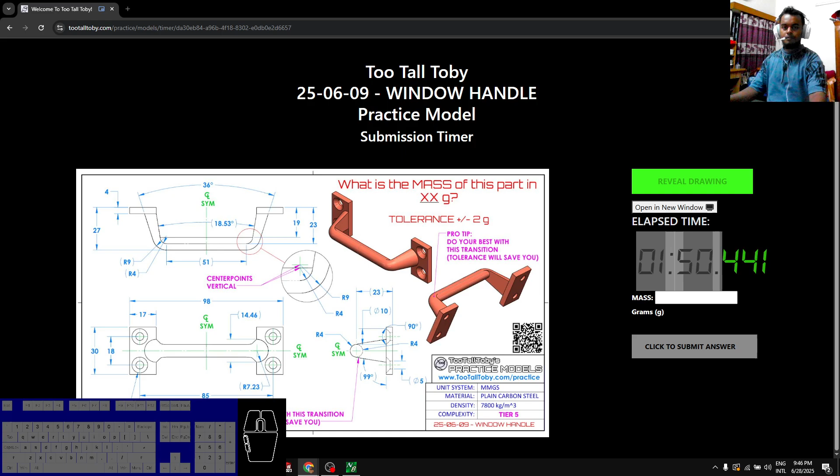Wait, let me just open this in a new window. There we go. Alright, let's begin.

Select the front plane, sketch. Throughout this video I'll be using shortcuts which you can see in the overlay.

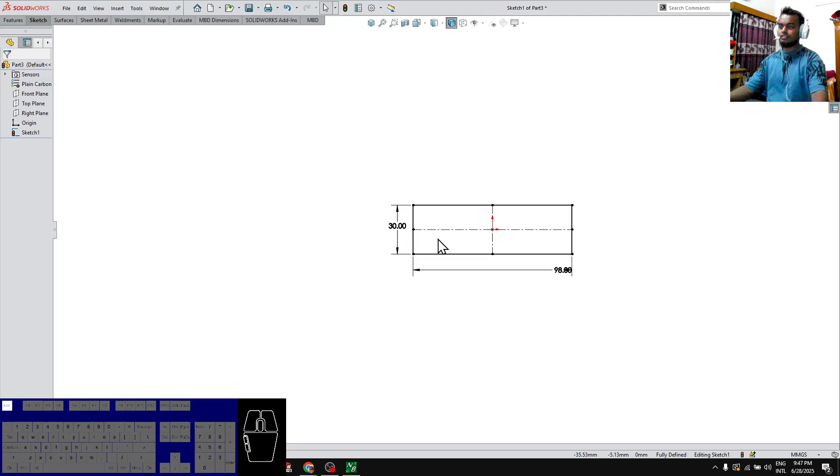Sorry, this one should be 98. This one should be 30. And another rectangle, which is 17 millimeters. Shift Alt, hold it and select these two regions, and a context menu pulls up the extruded boss base.

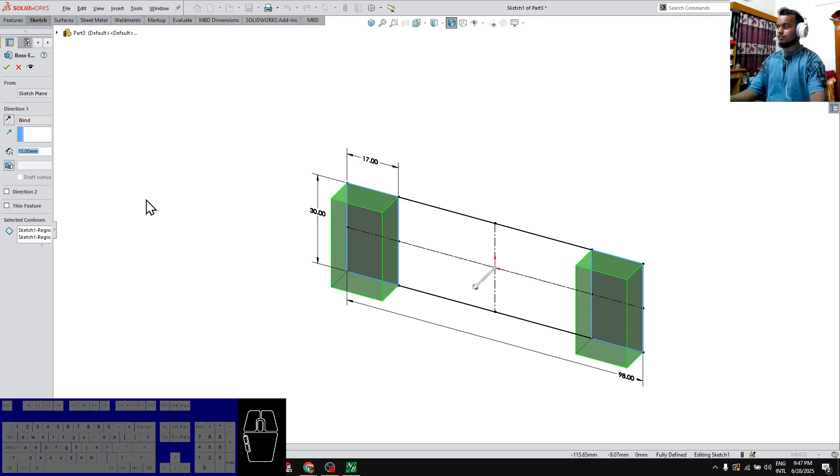We can extrude it 4 millimeters. Then we can sketch that circle in the right plane. It goes up to 23.

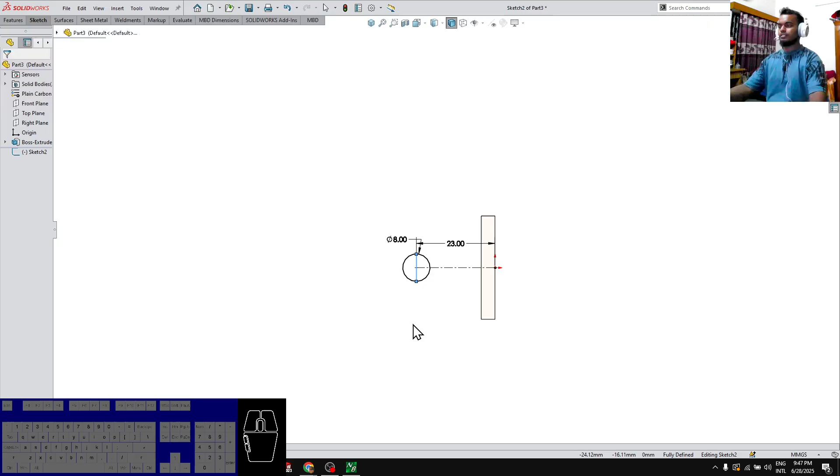Then draw that circle of radius 4, which means the diameter should be 8. We'll only extrude half of it just so we have a nice path, a nice profile for the loft. Right click mid plane and type in 51.

Now we have this profile. Now we need one half circle right here, and then we need the path for the guide curve. Let's create the half circle in this face.

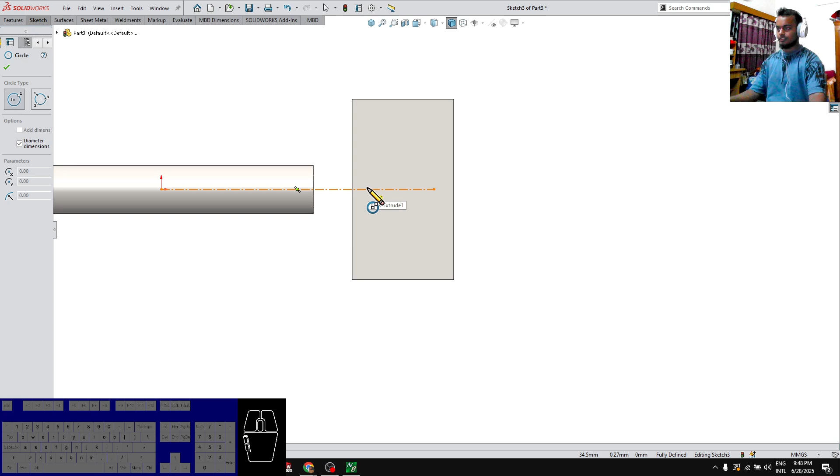Okay, let's create a centerline for maintaining symmetry in the circle. The circle has a diameter given as 7.23 times 2. And let's just convert this entity, delete this thing.

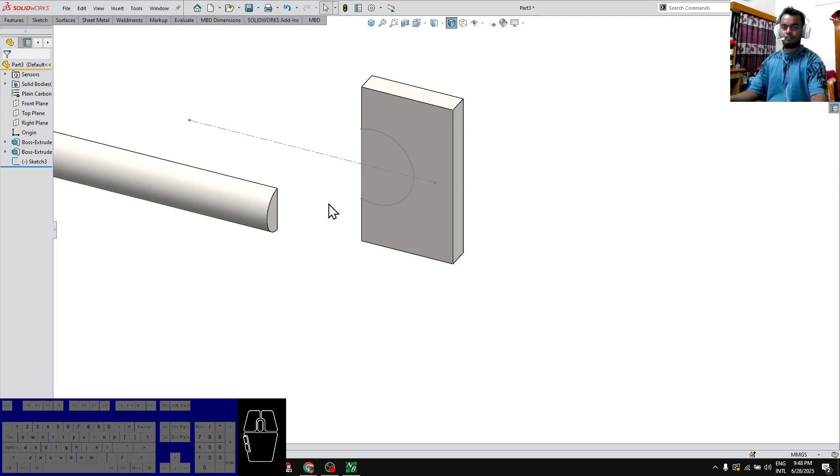Okay, we have a basic path. We don't need to fully define it, we will fully define it later. Now we will create that path.

Let's select this face and go to sketch, convert entities. Let's drop it down and select intersection of curve. What this does is create a nice line which intersects that curve in our plane.

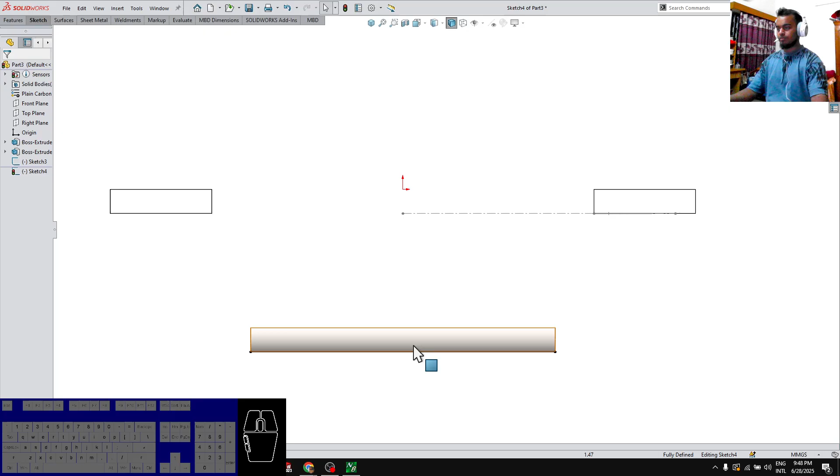Now we can draw a tangent arc, and then connect it right here. Make this tangent as well.

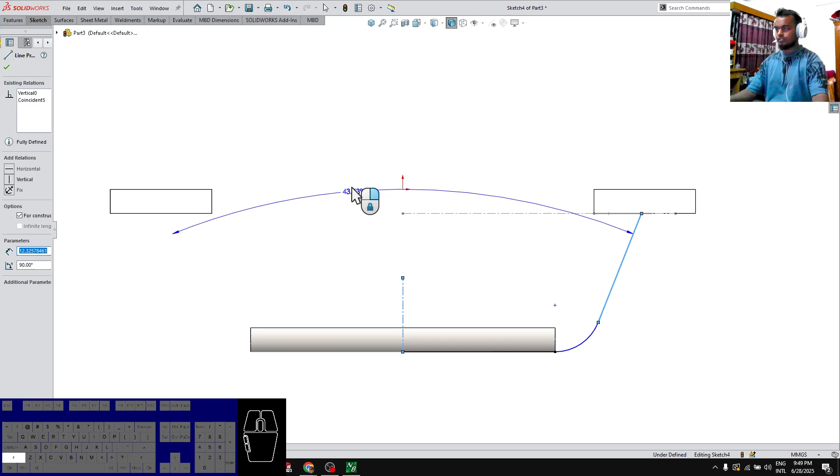The angle with the central axis is 36 degrees. The radius of this fillet is 9. Okay, now it's fully defined, and this is the point where this circle should terminate.

Let's hold the sketch and drop it above the sketch. Otherwise, we cannot create a relation between these two.

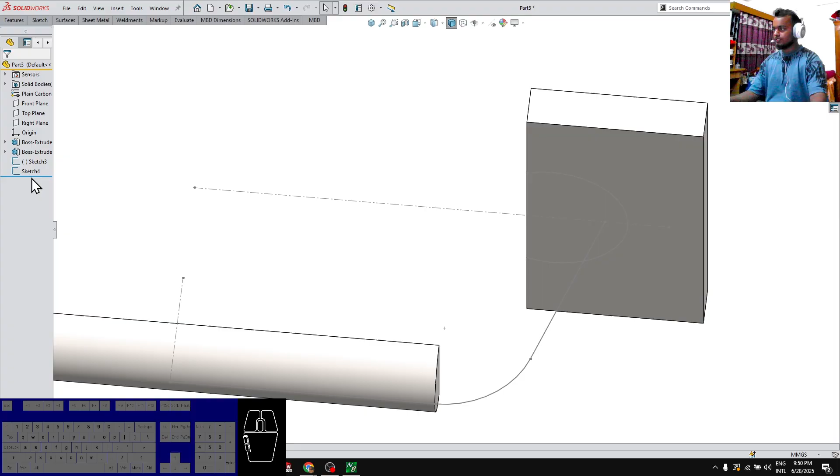Okay, this is not doable because we have used a line from that sketch. Now we will just delete this sketch. No, we can just delete this sketch and draw it once again. Yeah, no, I think we can just draw another sketch. Let's just draw another sketch.

Because it has been derived and it is now a parent of the sketch, make this point and this circle coincident. The diameter should be 7.23 times 2.

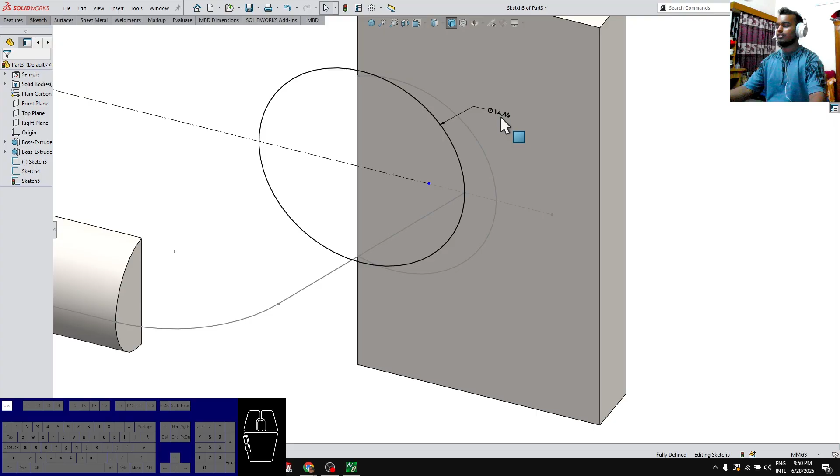Now it's fully defined. Let's convert this entity and delete everything that's not necessary for us. Now we have a closed contour. We don't need to see this sketch, but we can't delete it either because it's a parent.

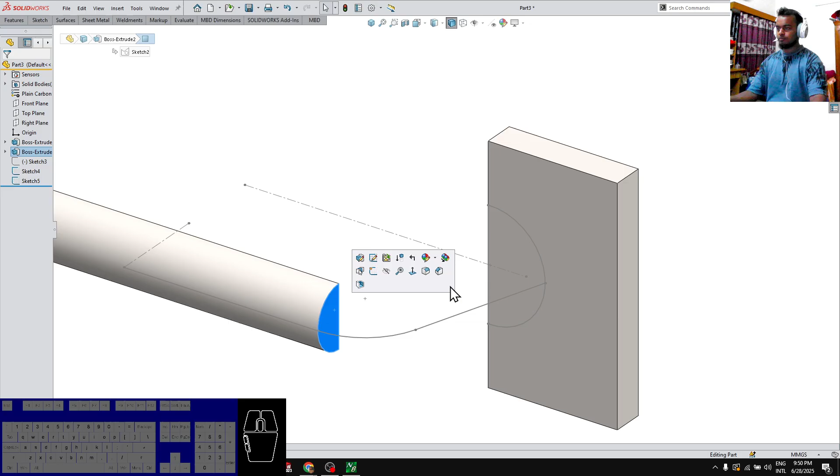Now we have two profiles for the loft and a guide curve. One guide curve is not enough, so let's get another guide curve real quick.

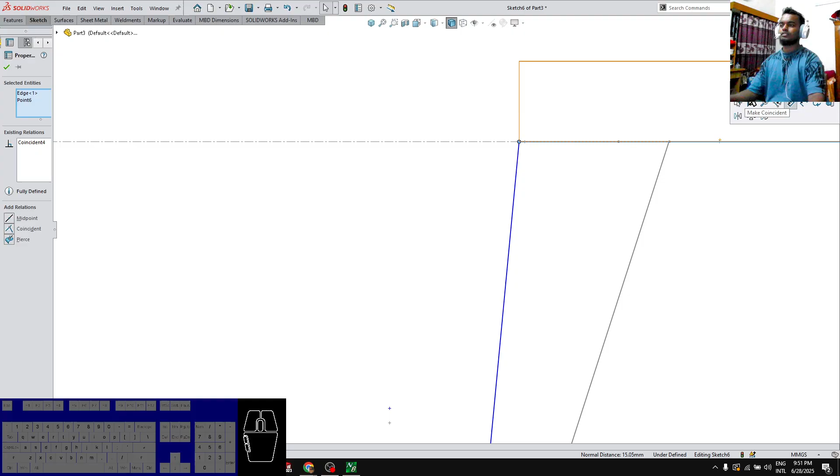Okay, it touches here and also coincides with this tangent. Radius is 4 millimeters and that's fully defined. Now we have two paths that we can use as a guide curve.

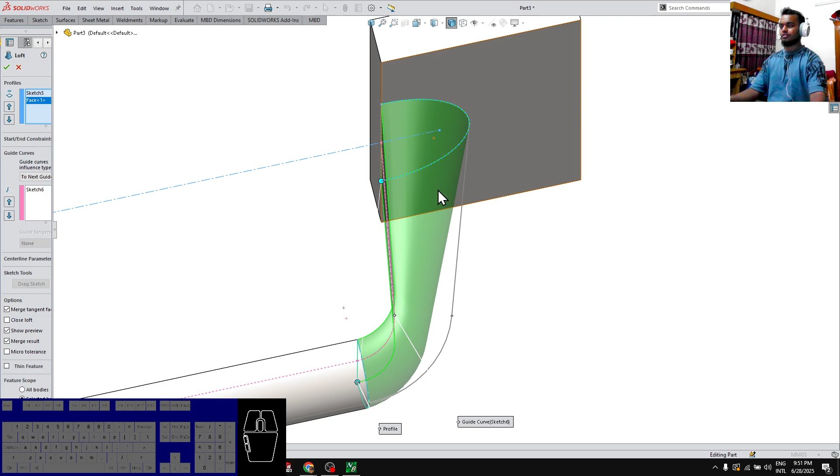Let's go features, lofted boss base, select the profiles, this one and this face right here. See, it is not going as we want it to go. So we will right click selection manager in the guide curve and select group, this one and this one, right click. See, it's a nice transition.

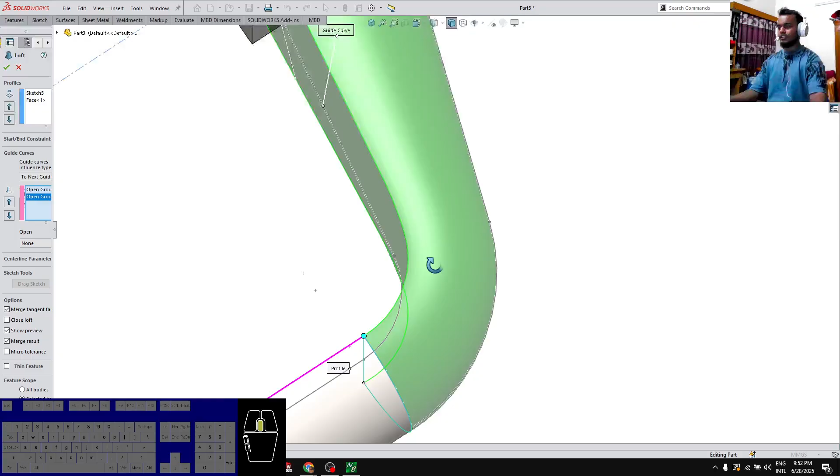We don't have the correct transition for this portion, so we will go again to selection manager and select these two groups again, and now this is perfectly just as we wanted. Hit OK.

There we go. Now we just need to mirror it. Okay, we don't need this body anymore. We will delete this body and also use the right plane to cut with surface for this body, then mirror this across.

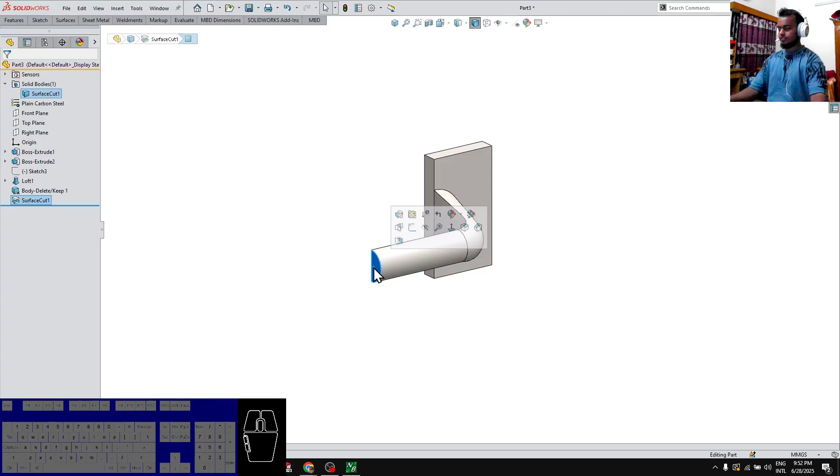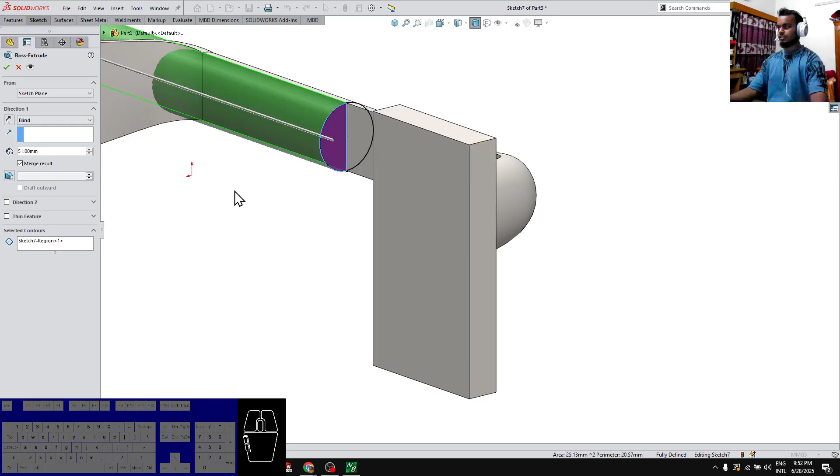Okay, now we will need to terminate this half circle, sketch on the right plane. Convert this entity and connect it to create the half circle that we will extrude in one direction. Let's say in this direction, and for direction 2 it should be up to this surface.

Let's go, it's done. Only thing we need to do is add the nice countersink holes. Okay, not here but in this face.

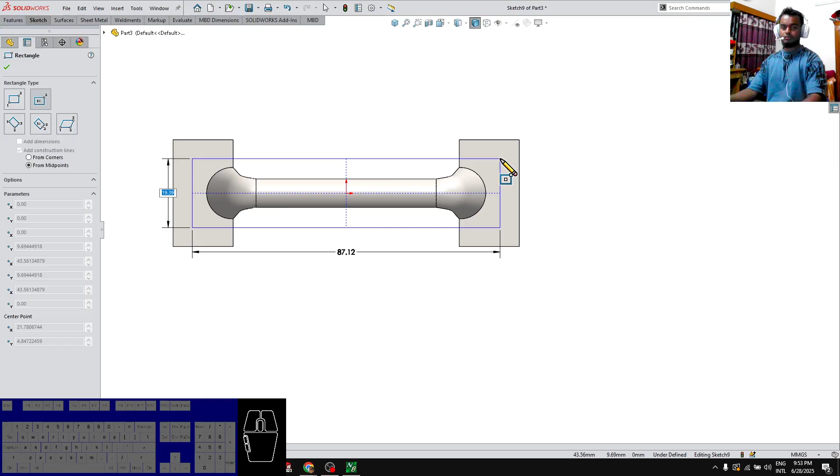Center rectangle, the dimensions are 18 by 85. We have 4 points. Add the hole wizard, so this one is a countersink hole of custom size.

5 by 10 and 90. Position it in these 4 corners. Right click and done.

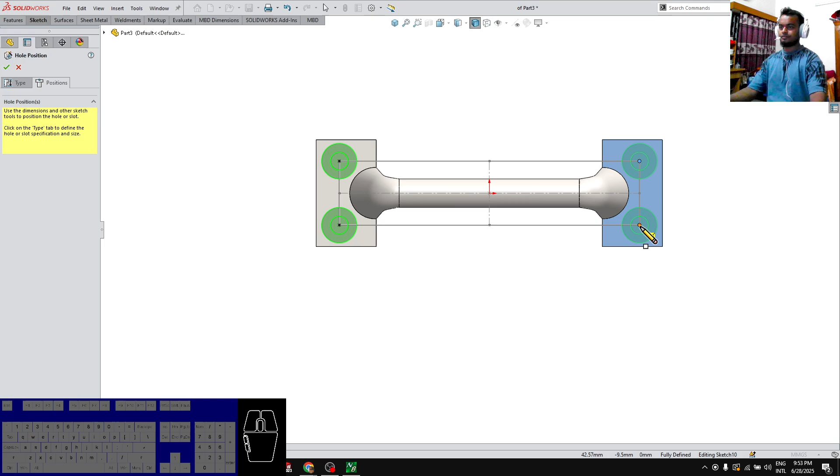Let's add a nice color. Oh yeah, this is nicely done. This is a nice smooth transition for the lofted boss base with guide curves.

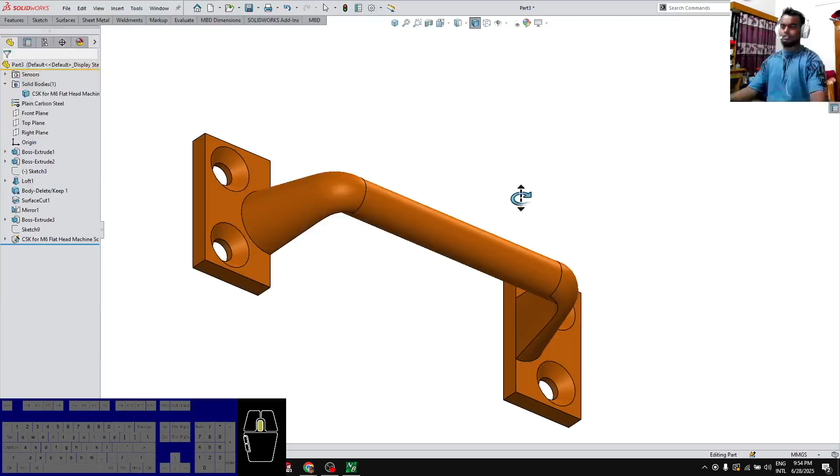Let's check the mass properties. 67.43 grams. Oh yeah, it's correct. It took us 9 minutes and 25 seconds.